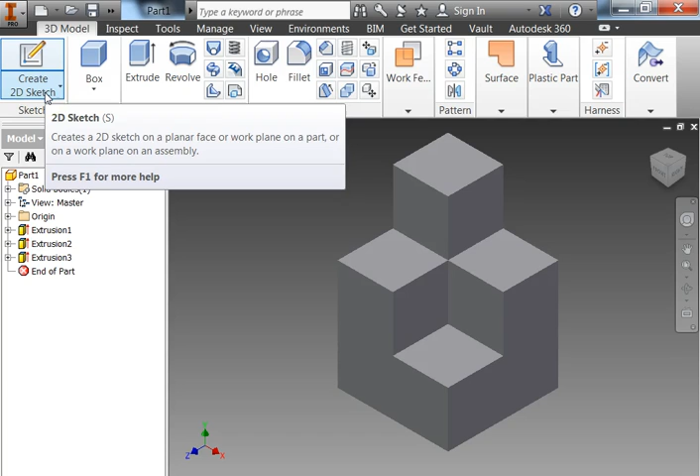Alright, so here is part 1. We're going to add on the pieces to create part 2 now. The first thing I'm going to do is put the hole feature on the top, which is a 1-inch diameter hole that is 1 inch deep.

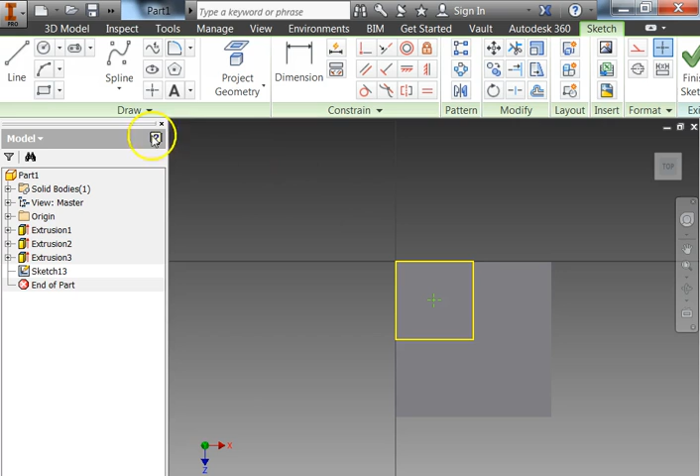So I'm going to create a 2D sketch. First I want to select that top where I want to put that sketch. I'm going to find the center point. Remember, when you go onto an object, you want to find those two dotted lines that line up. So I'll plot that center point, left click, right click, OK. Then I'll right click and finish that.

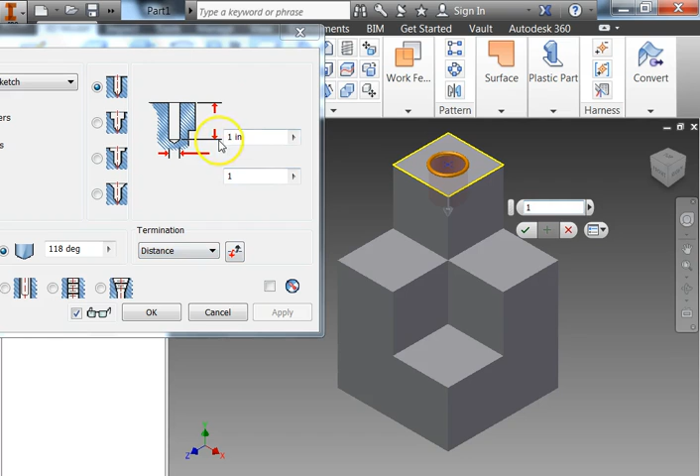So then I'm going to go to the hole feature, and you'll notice it's going to put that hole right where that point is. As I said, I need the diameter to be 1 inch, so I'll change that to 1. And I need the distance to be 1 inch, which is what it is there as well. So there, I'm good with that.

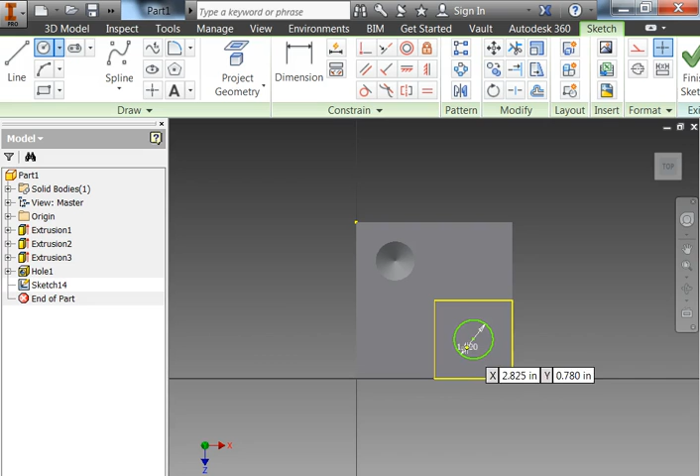Now I'm going to put that 1 inch diameter cylinder that's 1 inch tall on this surface. So again, create a 2D sketch, select that surface. Get my circle, find the center, left click, 1 inch diameter, right click, finish 2D sketch, right click, extrude, select what you want to extrude first, otherwise you might get an error message, and I do want it extruded 1 inch.

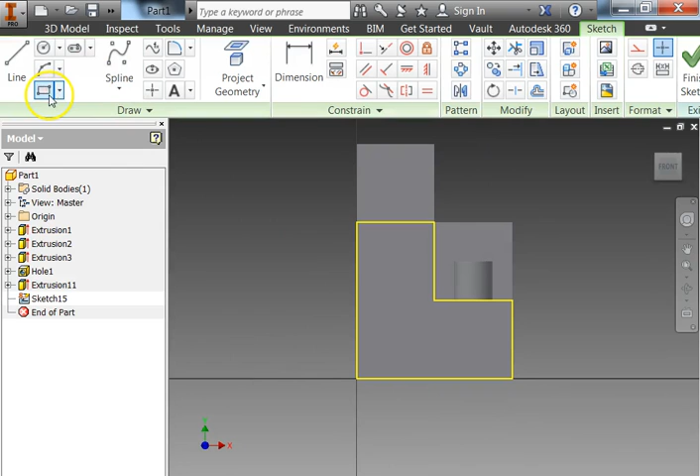Alright, let's put that square over here, a square peg. Again, create a 2D sketch, select that surface. This time I'm going to pick the 2-point center rectangle. Find the center where those two dotted lines line up, right there. Left click. I want a 1 inch by 1 inch square, so 1, tab, 1, enter. Right click, finish 2D sketch. Right click, extrude, click on what I want to extrude. I want it extruded 1 inch. And we then check the green check mark.

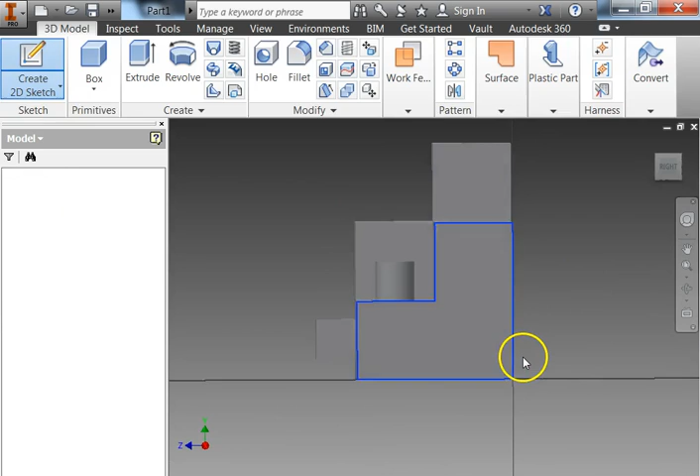Now we need to put the square hole over here. So again, create another 2D sketch, select where I want to do that. Pick my 2-point center rectangle, find the center here, left click. 1, tab, 1, enter, right click, finish 2D sketch, right click, extrude, select the center of that, but instead remember I need to change the direction. I want to change it to direction 2.

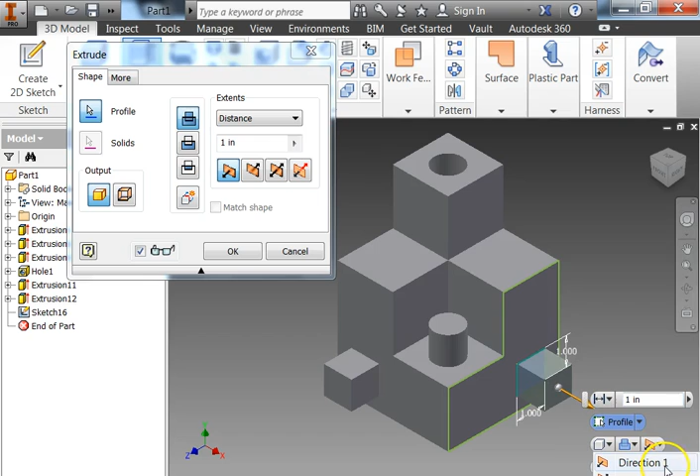And I am done with stage 2.

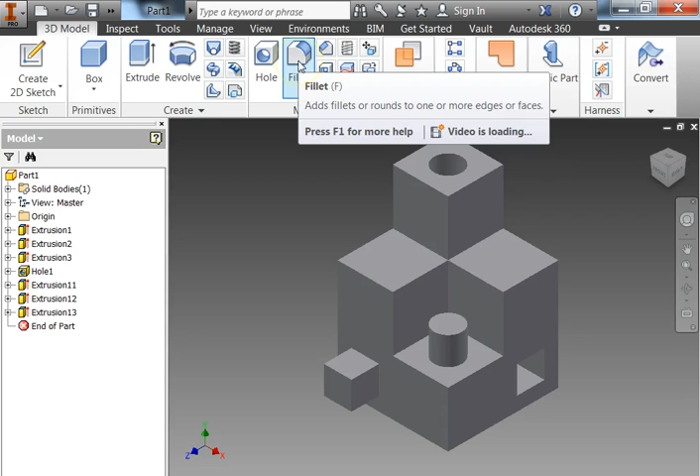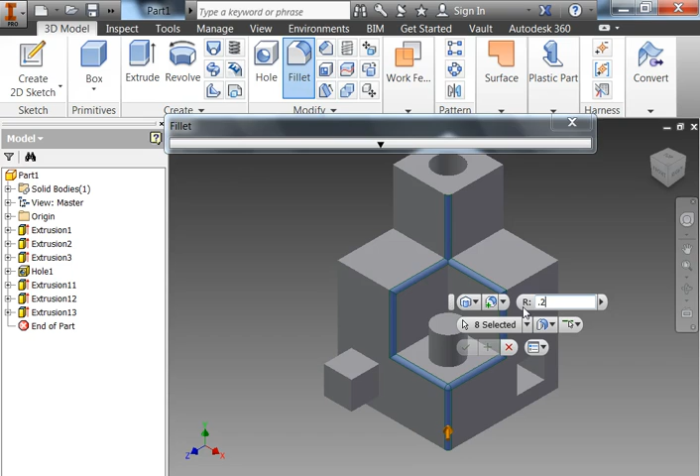For stage 3, you're going to use this fillet tool and this chamfer tool. Fillet is going to give you the rounded edges, chamfer is going to give you the square edges. So I'm going to use the fillet, and I'm going to select all of the edges I want rounded first, which I believe are all of those. And I want it rounded with a radius of 0.25 according to the blueprint. Okay, select that. And there are my rounded edges.

Let's do the chamfering here. I want these 4 edges chamfered, and I also want those 0.25.

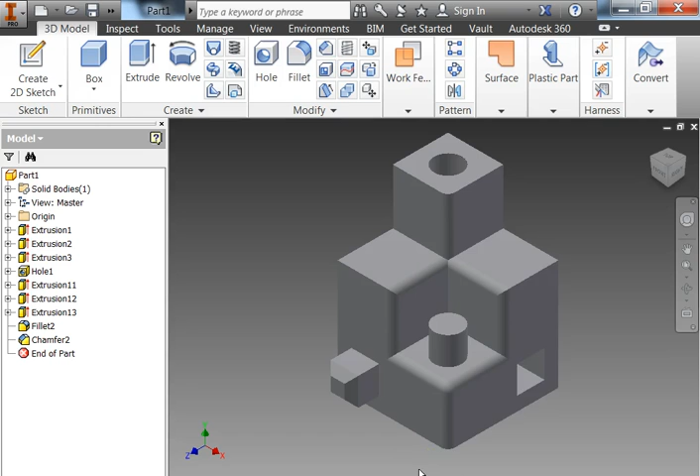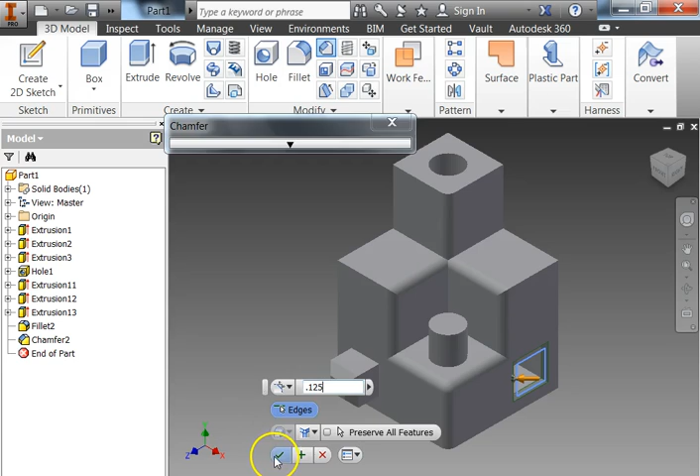I also want these edges of this square hole chamfered. So we'll select those 4 edges. And I believe instead of a 0.25 though, I'm going to change that to a 0.125. And there is that hole.

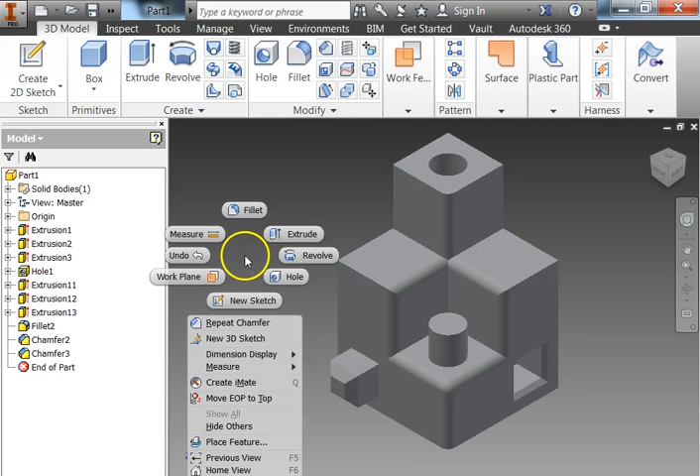So, the only thing I haven't shown you yet is just the curves on the side, and we're going to skip that for now. I just basically want you to get this part done here. If you can get that far, we are good to go. So go ahead then, and save that as your part 3, or whatever you want to save that as.